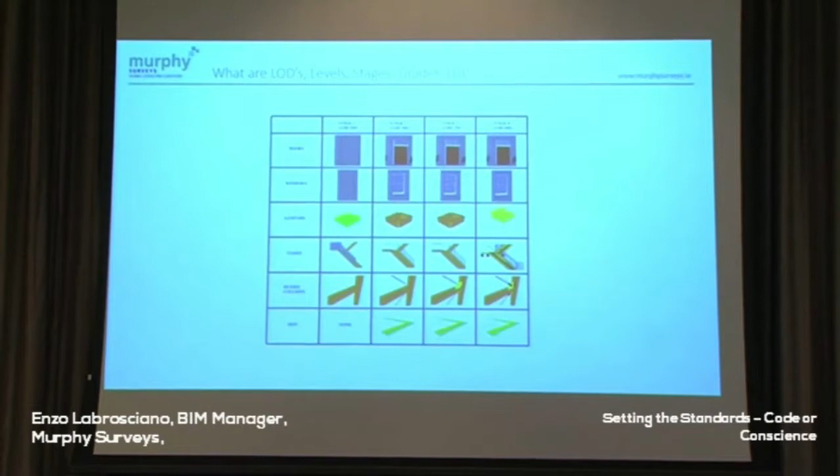Essentially, this is a quick guide that we use for each stage or level of detail, going across from left to right: 200, 300, 400, 500. And as we drop down is what levels you'd expect from doors, windows, staircases, things like that. So you can see what you're going to get at those levels.

What level of information do you need? Are you just going to use it for floor plans? Well, let's just get a level 2 model out to you so you can start work on it straight away rather than waiting an extra week, 2 weeks for all the detail to be put into a model when actually you just want to get planning, start ordering materials, things like that.

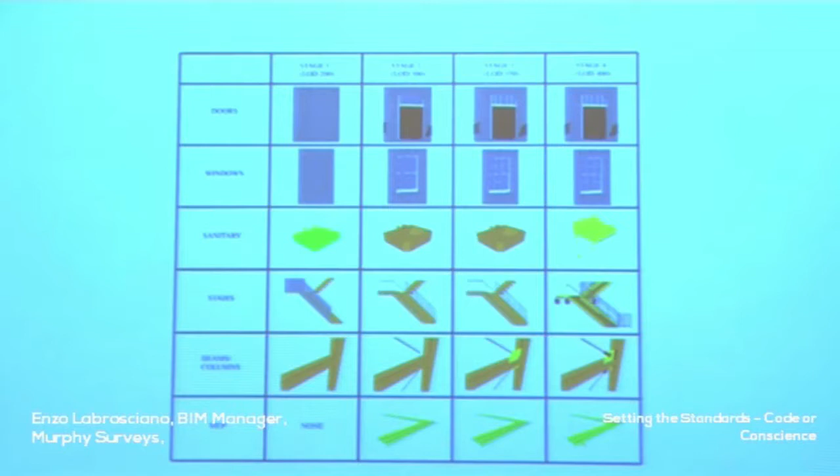So at level 200, this is our standard of what we'd include, what you should be expecting. You can see on the bottom there's the point cloud, and above, it's drawn to the specifications, so you can get a gist of what the model will look like.

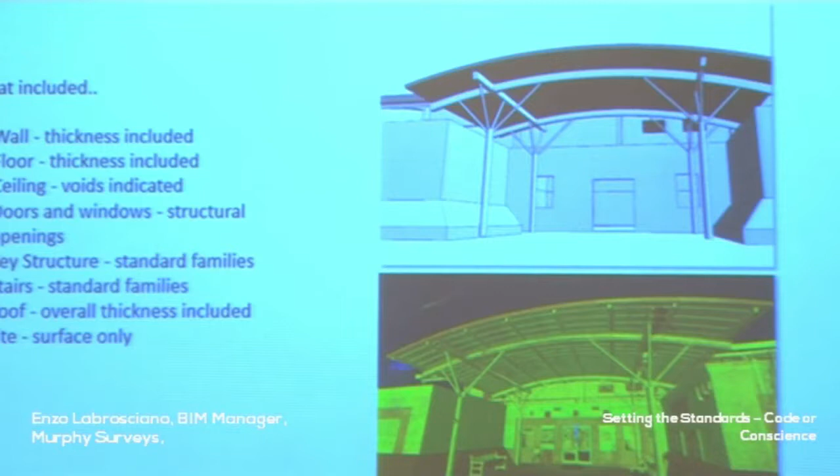What are they for? They're really great for things like rights of light models. These are the ones you want to be asking for. You don't need the pretty windows of the building opposite. It's not your site. We're more than happy to do that for you, but just making sure that you're getting a fit-for-purpose model. Space analysis, you can see from the image on the right that you can still take quantity, like square footage, off it.

So if you're ordering carpets, if you're designing a school and you need to make sure your square footage in the room is, I don't know what it is in Ireland, but for primary schools in England it's 54 square metres for a classroom, so you've got to make sure that you're in that. These are essentially all you need to be covering these.

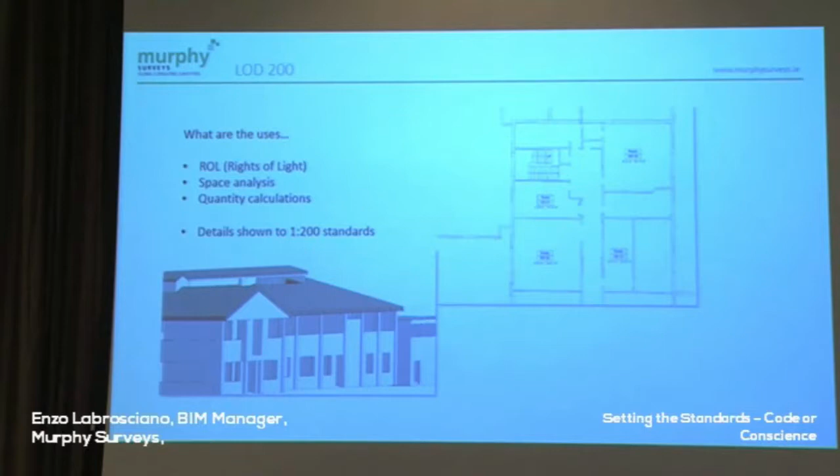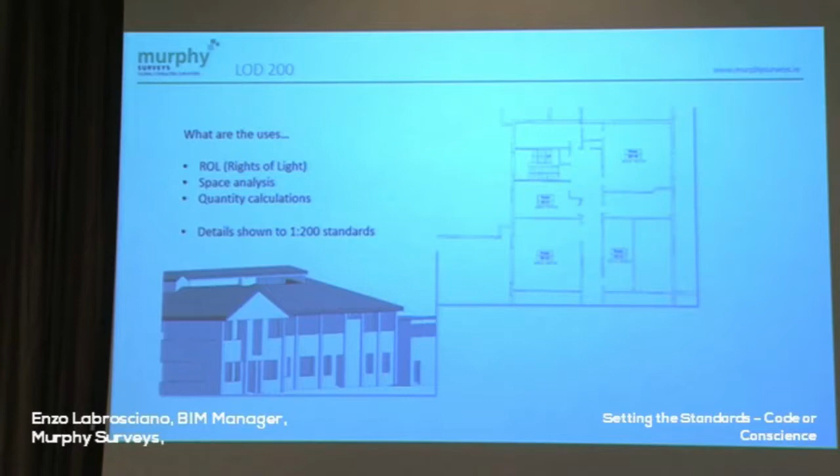To take it into RICS or old money, if you like, if you're taking elevations off that, what you'd expect is a 1 to 200 elevation. I know that helps a lot of people in the understanding of that. If you need a tighter model within these levels, ask for it and people can adapt their modelling around it. Tolerances can be brought in tighter, but just as a guide, this is what we would expect it to deliver.

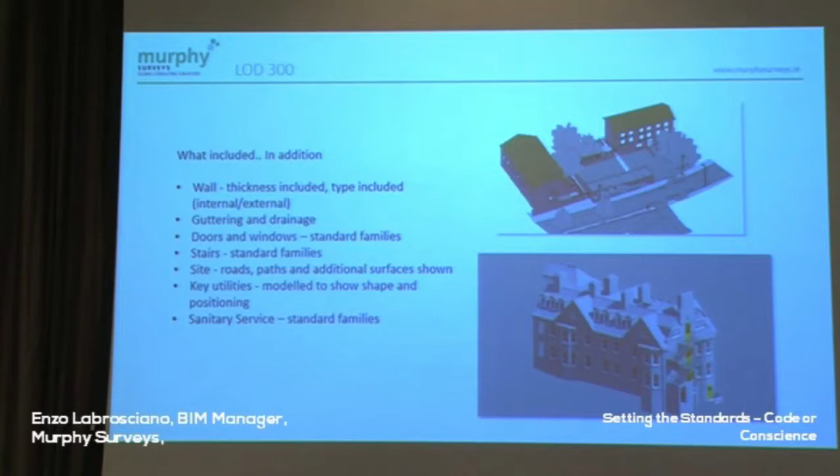At level 300, you start to get more information included. We'll touch upon information later, but you can see from the top model that you start to get street furniture around that. And in the bottom one, you start to get window families developed for you as part of it. So your building's beginning to take a real life architectural approach, if you like. And for that, it's essentially a 1 to 100.

The image on the top right is one that's quite important to us. This shows the accuracy of our model. It's just a cross-section of a random model that we chose. Within the Revit file, it's just sectioned off, and in there is the architectural and the structural detailing, and we've left the point cloud in.

Hopefully you can see it's a clean line where the section is taken off. The accuracy and tolerances in there show where the model has been cut to, where it's been drawn to against the point cloud. So hopefully it will line up. If you want a closer look, we've got it outside and you can scrutinise our work.

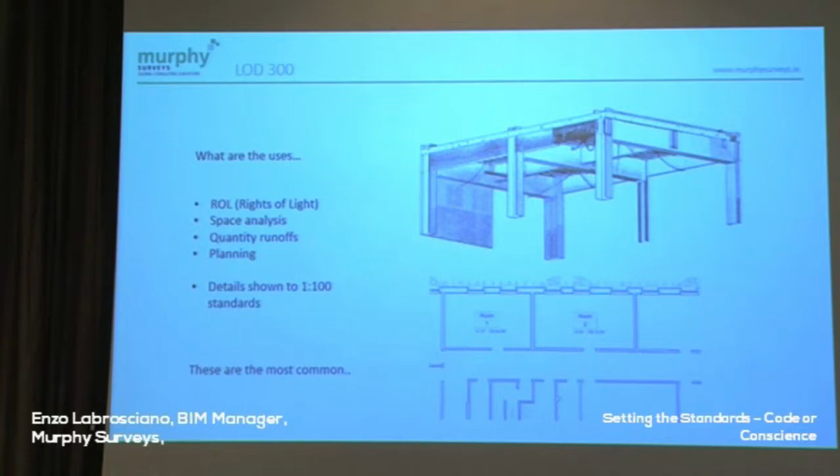But it's something we're really happy to do at any stage within any of our models, give you a cross-section so people can see exactly where things are coming from, how accurate their model is, and if there's any discrepancies, then we don't want that going out the door as much as people want to receive it.

But you can see on the image, again, top right there, when you start to get structural models, you start to get all the joints involved in there. So you can do structural analysis, you can export that into structural analysis programs. I know some people will use Revit Structure for that, but there are preferred ones out there from some of our clients. So they will export that and do their structural analysis with the joints involved. And then, yeah, great visualizations from that.

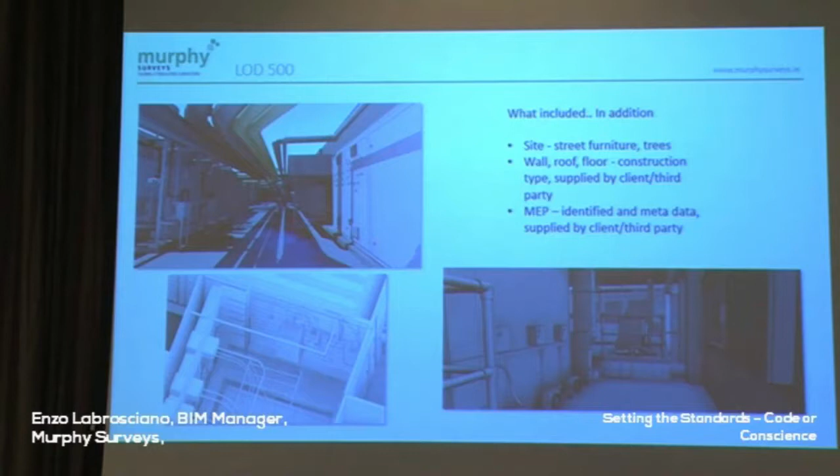So as you've got your visualization tool, you can see that there's a fan on the floor, and when you go to site, it will look exactly the same. All these models were drawn in Revit solely. They're not imported families from anywhere else. They've been drawn in-house, bespoke to specific projects. So we'll do all that in-house if people need that kind of information. Like I say, they're great for when buildings are passed on to the future owners, so they can actually get a real grasp and control of their costings.

And scale-wise, you can go from 1 to 20 or right down to 1 to 5. And I think these two images here show the detail you can go down to. So the one on the left, you can see that run of just electric cable along the roof. And the one on the right even shows where the tacks are holding that cable down are included. So probably not your everyday what you'd need, but modelling-wise, you can go down to any detail that you feel you need.

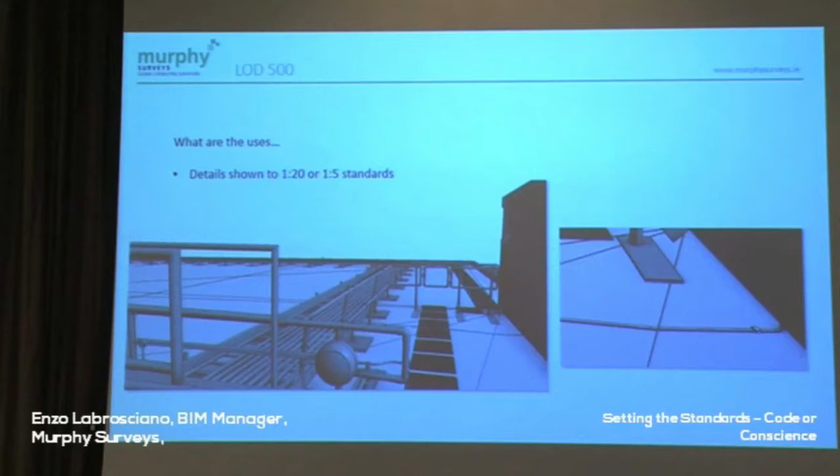The importance of information. So again, this can be at any stage. So there's no need to get an LOD 500 model done if you don't need to. The information could be included at a level 200. So the text may be a little tight on the right, but they're just screenshots of Revit pages open. You can see any data sets can be included, so we can add or take out any information that's specifically needed. So on the one on the right we have just selected a column, so it will give you what floor that column's on, the dimensions of that column, the height of that column. You can therefore use it for materials for planning in advance.

But it's also just really basic information, or you can add as much complicated information, like the one at the bottom. That's just a section of air conditioning units. So the pipe and manufacturer dimensions are all included down on the left. So as standard, we include the category, so whether it's a wall, a window, things like that, the position, so the floor, the height above that floor level, the size, obviously for openings, for clearance, things like that, and the type.

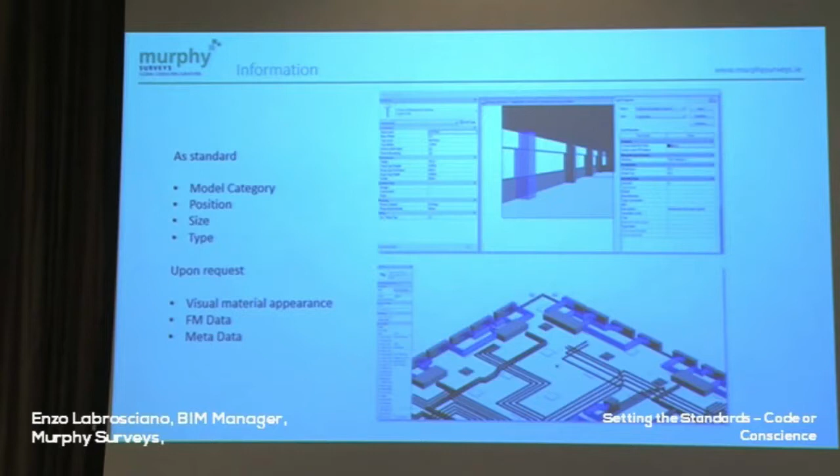And I've put upon request. Essentially, upon request, most survey companies will add however much information you desire. But a standard request that we have is visual material appearance. We don't start drilling into your building or property. FM data for passing on to your future clients, for ordering of new boiler systems, things like that, and any other metadata that you may have. As standard now, we deliver TruViews with our products. So when the scan's taken place, we then use an iStar to take photogrammetry from the same place and overlay it.

With this, you can then take any measurements from it, you can leave notes on it, but you can also asset manage anything there. So if you've gone for a level 200 model but you've requested it to be scanned, we can deliver this as well. So although you may only have a box of dimensions on the wall in your basic model, you will have imagery to show you exactly what is there. So you can pick and choose.

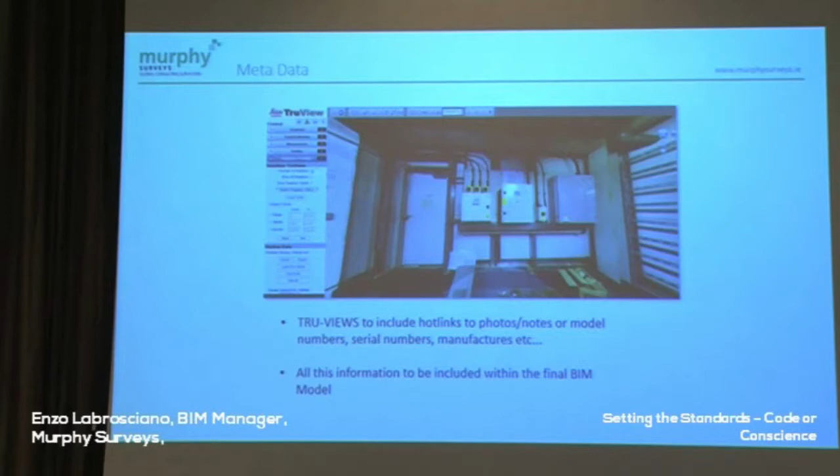One of the key things with all of this is, we've got it. In fact, it's seamlessly gone on to BIM survey solutions. So one of the key things is don't just ask for a level 200 or level 300 model. We would advise that different levels are used at different places. So you could have a level 300 exterior for planning, but a level 200 inside for just space analysis.

Or we're doing a current project at the moment where even individual rooms on individual floors are all bespoke to different levels. We've sat down, we've had many meetings with the clients to see what they actually need from each specific room, which ones they're going to keep, which ones they're going to clear out, and it makes a much better process that we're not delivering more than they need, and obviously they're not paying for more than they need.

We'll also go out and use BIM for setting out back on site. We'll use Point Layout or other tools like that to ensure that the setting out process is also from the original scan or from your original model, to make sure there's accuracy back on site. It's not just one-way traffic.

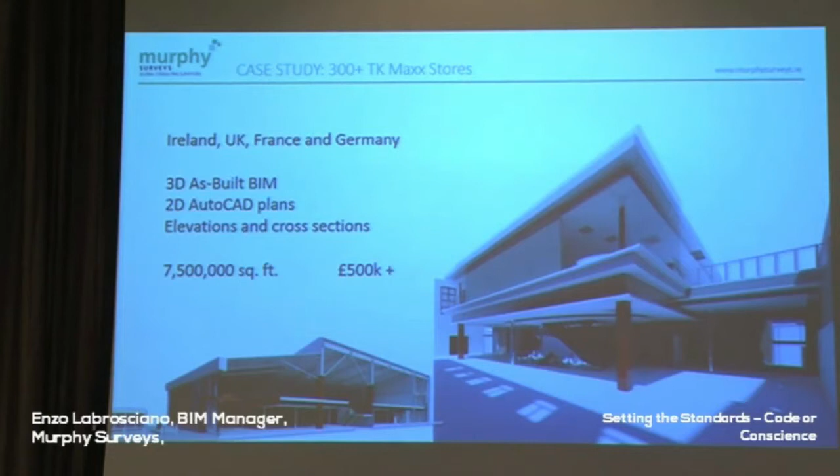Thanks for the presentation. Just in terms of the level of detail that you produce, is that done in the office as opposed to the scan on site? The scan on site is the standard, is it?

So, as I mentioned briefly, in some cases we'll always say we'll take a scan of the site. The advantage of doing that is that if the client says, at this stage I just want the model to this level of detail, and we go and scan it and later on they need some more information, there's no return to site. So therefore there's no extra site costs involved at that stage.

I probably have a hesitation of saying, let's scan everything. Scanning is great, it does capture all the information, but it can add processing time back in the office, just getting the scans together, getting them into the right format, indexing them into Revit. It's just extra time that possibly we can cut out of the process. So not if we can MBS it, but in some cases, MBSing buildings is a preferred route.

I know colleagues are here who are shaking their heads, who are saying, no, we'll scan it, because I know some of our modelers much prefer modelling from scan data. From their point of view, they can see the complete package of exactly what's there rather than just what a surveyor on site is giving them. I think there needs to be possibly an understanding that just because we can model everything, I don't think that means we should. Don't take that out of context, because that sounds like we don't model things. But it's just a case of you can over model, and we're happy to do it.